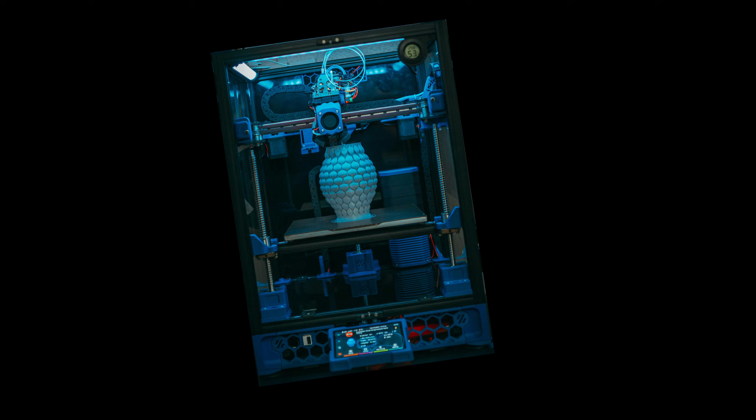After diving deep into choosing your first FDM 3D printer in our last video, it's time to talk about what truly brings your creations to life, the filament. Choosing the right material for your 3D prints is just as crucial as having a great printer. Get it right, and your prints will be strong, beautiful, and exactly what you envisioned. Get it wrong, and you might face frustrating failures, wasted time, and materials.

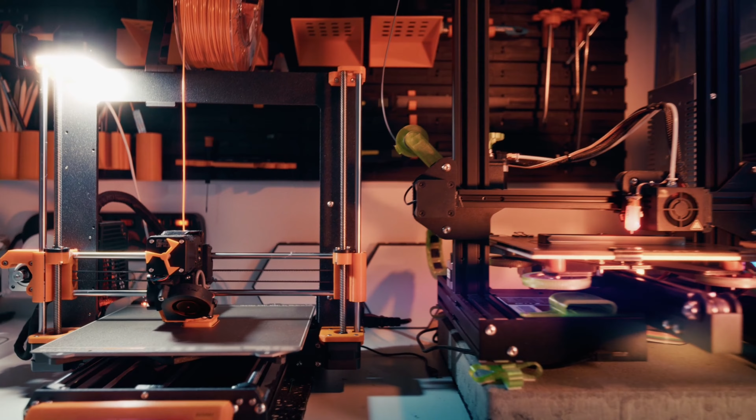So, today I'm going to guide you through the essential FDM 3D printing filaments, focusing on the ones you'll encounter most as a beginner and give you the knowledge to confidently pick the perfect material for any project.

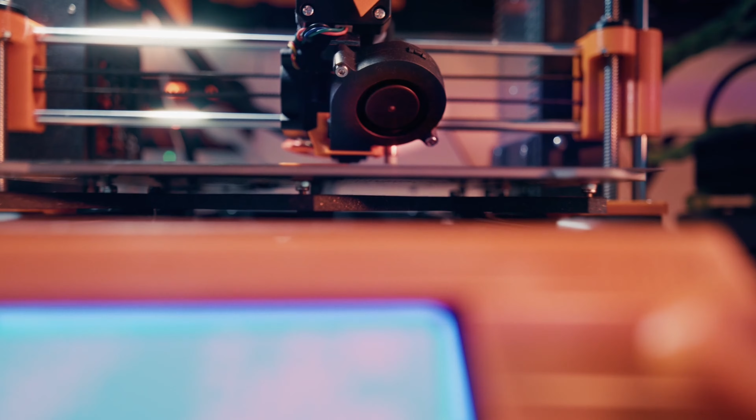First off, what exactly is filament? Think of it as the ink for your 3D printer. It's typically a plastic material wound onto a spool that your FDM printer heats up and extrudes, layer by microscopic layer, to build your design from the ground up. Understanding its properties is key to successful printing.

Let's start with the undisputed champion for beginners, PLA, or polylactic acid. If you are just getting into 3D printing, chances are your first successful prints will be with PLA. It's incredibly easy to print with, boasts minimal warping, and emits no strong odors, making it perfect for home environments.

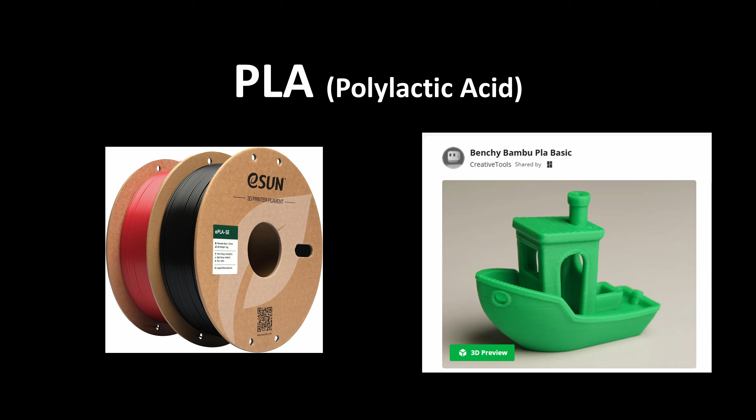PLA is fantastic for prototyping, decorative prints like vases or figurines, and non-functional parts where high strength isn't the primary concern. When printing with PLA, you will typically use lower temperatures compared to other filaments. Good bed adhesion is usually achieved with simple methods like blue painter's tape or a glue stick, and you won't

need a heated enclosure. Its pros are clear: ease of use, a vast array of vibrant colors, and it's derived from renewable resources like cornstarch, making it biodegradable. However, it can be a bit brittle and has lower heat resistance, meaning parts might deform in hot environments like a car on a sunny day.

A common beginner mistake is leaving PLA exposed to humidity, which can degrade its quality over time, leading to issues like stringing or brittle prints. Always store your PLA in a dry place.

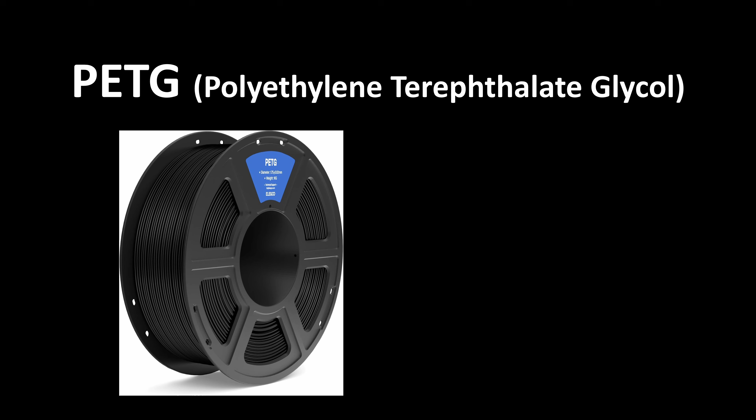Moving up a notch in durability, we have PETG, polyethylene terephthalate glycol. This material is often considered the best of both worlds, offering more strength and flexibility than PLA, along with excellent layer adhesion. It's also known for its food safe options, making it suitable for functional parts, mechanical components, outdoor prints, or anything that needs a bit more resilience than PLA can offer.

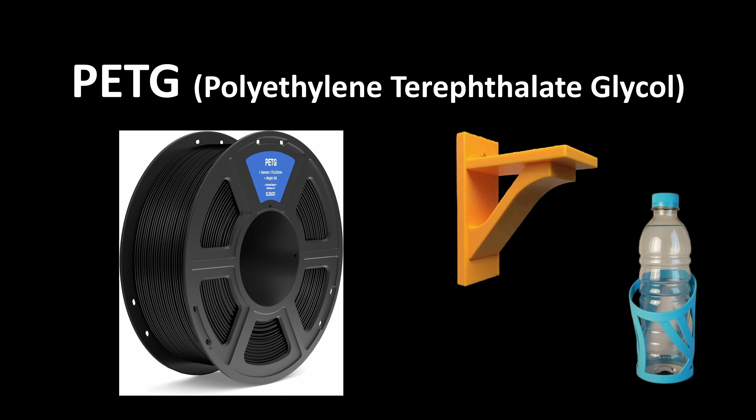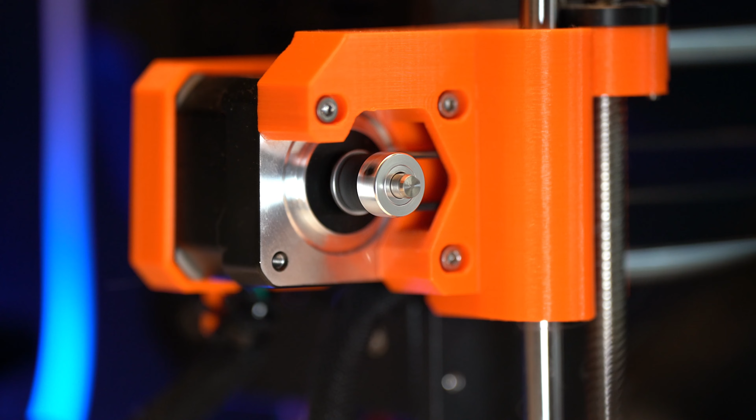Printing with PETG requires slightly higher temperatures than PLA, and you might notice it can be a bit stringy. This is where fine tuning your printer's retraction settings becomes crucial. Proper retraction pulls the filament back slightly when the print head moves, preventing those pesky strings. While not strictly necessary, PETG benefits greatly from a heated print bed for optimal adhesion.

Compared to PLA, PETG offers superior durability and better temperature resistance, but it's generally a bit trickier to print than PLA, though still much easier than our next material, ABS.

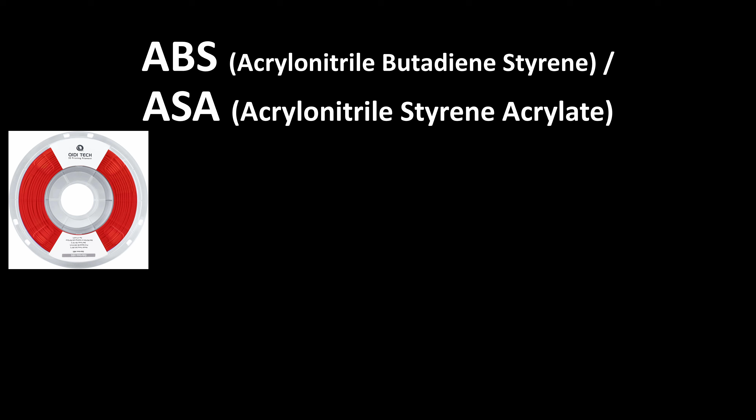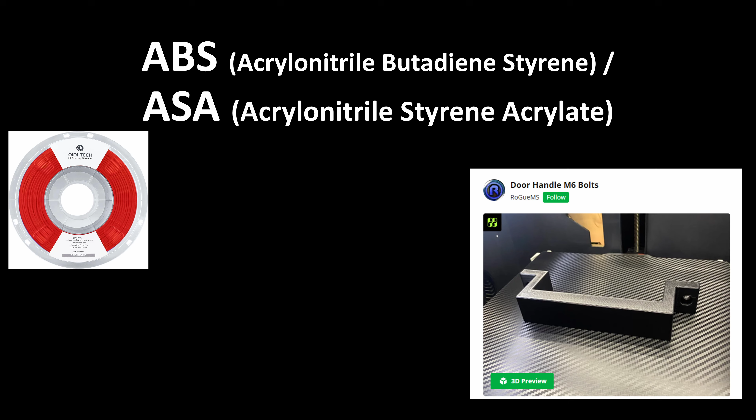Then there is ABS, or acrylonitrile butadiene styrene, the classic workhorse of 3D printing. ABS is incredibly strong, impact resistant, and boasts excellent heat resistance, making it ideal for mechanical parts, electronic enclosures, automotive components, or any item that will face higher temperatures or significant stress.

However, ABS comes with its own set of challenges. It requires a heated print bed and often an enclosed printer to prevent warping and cracking, as it's prone to shrinking as it cools. Another important consideration is the fumes it emits during printing, which can be quite strong. Proper ventilation is essential when working with ABS.

While its strength is a huge advantage, the difficulty in printing and the ventilation requirements often steer beginners towards PLA or PETG first. For outdoor applications, you might also consider ASA, which shares many of ABS's properties but offers better UV resistance, preventing degradation from sunlight.

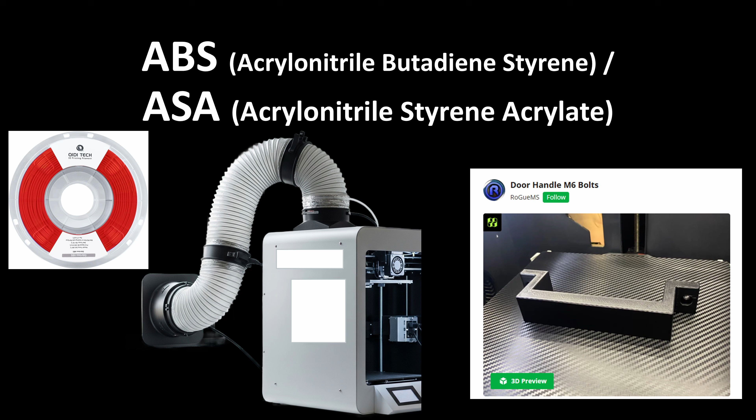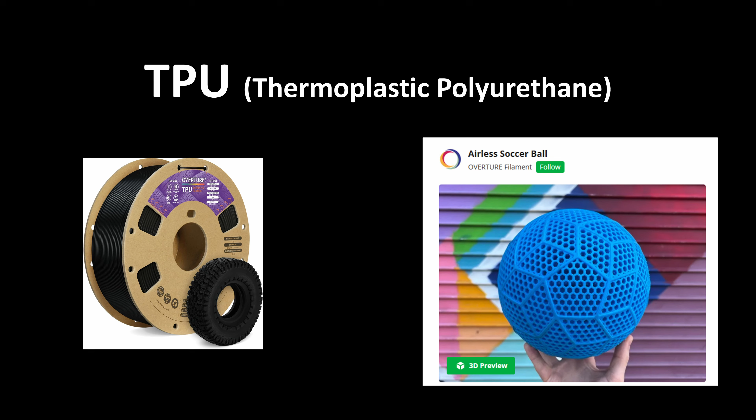Beyond these common three, there is a whole world of specialized filaments. Let's touch on a couple you might encounter as you advance. TPU, or thermoplastic polyurethane, is our go-to for flexible prints. Think rubber-like flexibility, perfect for phone cases, gaskets, or any part that needs to bend or absorb shock. You will print TPU slowly, and it often works best with direct drive extruders to prevent tangling.

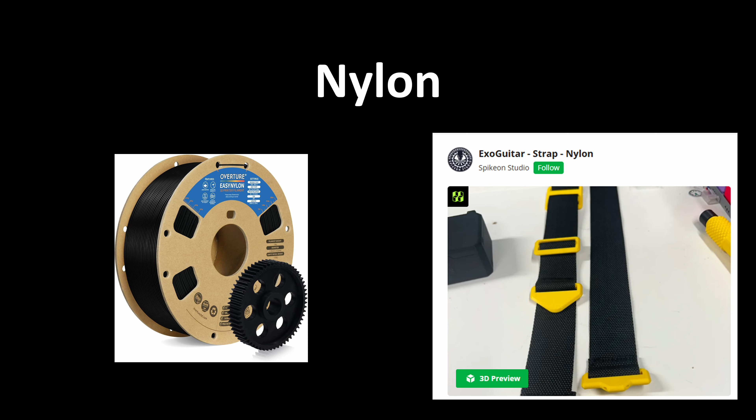For industrial level strength and low friction, we look to nylon. This material is incredibly durable and wear resistant, making it ideal for functional prototypes and gears. But be warned, nylon is highly hygroscopic, meaning it loves to absorb moisture from the air. It requires very dry storage and often benefits from a heated chamber during printing to achieve the best results. If your nylon sounds like popcorn when printing, it's wet.

Finally, we have composite filaments. These are standard filaments infused with other materials like carbon fiber, glass fiber, wood, or even metal particles. They offer unique aesthetics or enhanced properties, but beware, their abrasive nature often demands a hardened steel or ruby tipped nozzle, as standard brass nozzles will wear out quickly.

Now, let's take a look at different filament types and various flavors we have access to. Let's start with PLA, basic standard PLA. The most common, easy to print, wide range of opaque colors.

PLA Plus, enhanced version with improved strength, toughness, and sometimes better heat resistance and less brittleness than standard PLA. Silk PLA produces prints with a glossy, smooth, almost metallic or pearlescent finish, often resembling silk fabric.

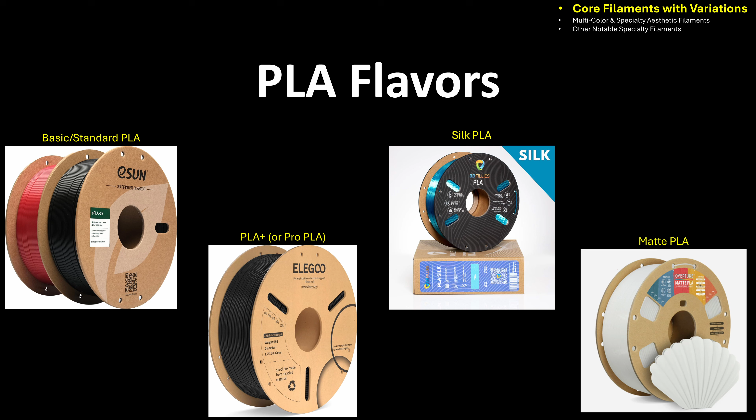Matte PLA offers a non-glossy, subdued finish, excellent for reducing visible layer lines and a more professional, less reflective look. Glow in the dark PLA contains phosphorescent pigments that absorb light and then glow in the dark. Available in various glow colors: green, blue, etc.

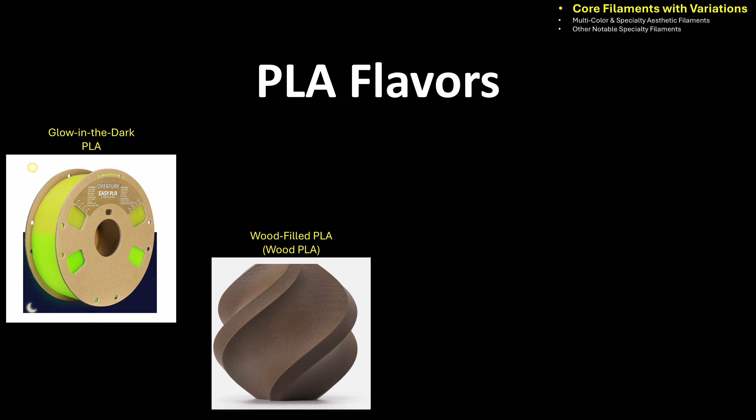Wood filled PLA or wood PLA contains real wood fibers, giving prints a wood-like appearance, texture, and even smell. Can often be stained or sanded. Metal filled PLA or metal PLA contains fine metal powders. For example, bronze, copper, aluminum, stainless steel. Prints have a metallic sheen and can often be post-processed, sanded, polished, patinated to look more like real metal.

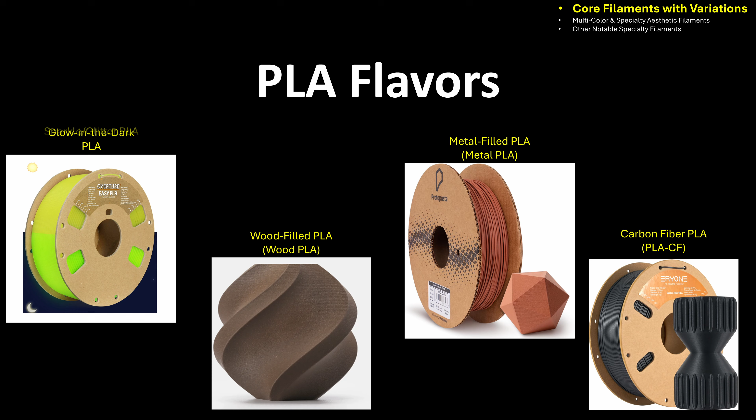Carbon fiber PLA or PLA-CF, infused with chopped carbon fibers, significantly increasing stiffness, strength, and dimensional stability while reducing weight. Requires an abrasive resistant nozzle. Sparkle or glitter PLA contains glitter or sparkly particles for a shimmering effect. Transparent or translucent PLA allows light to pass through, creating clear or semi-transparent prints.

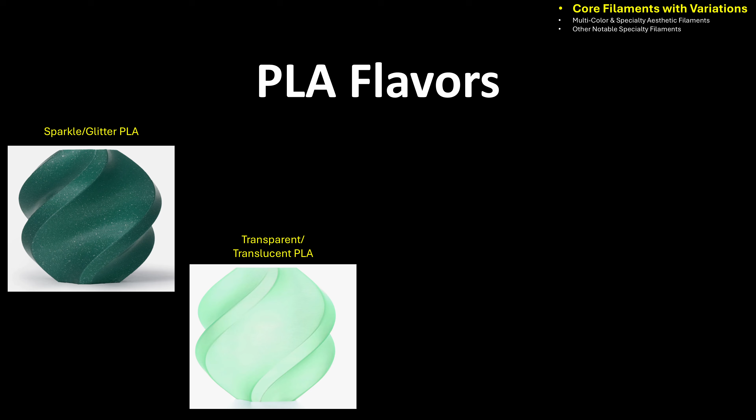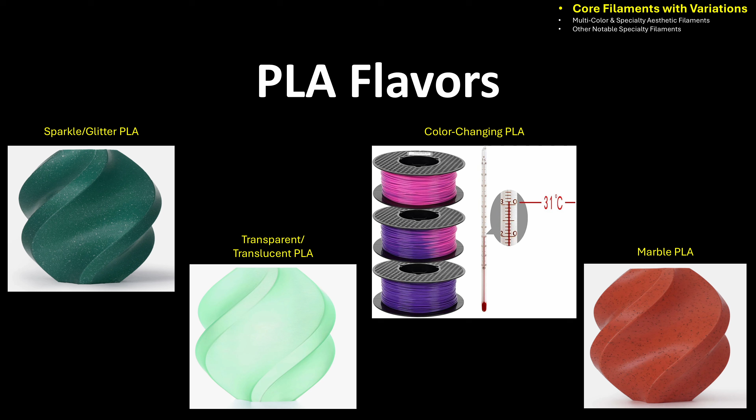Color changing PLA. Thermosensitive or thermochromic changes color based on temperature. UV reactive or photochromic changes color when exposed to UV light or sunlight. Marble PLA contains small flakes or particles to mimic the look of natural marble stone. High speed PLA or PLA-HS, formulated for faster printing speeds with less risk of clogging or loss of quality, often optimized for newer high speed printers.

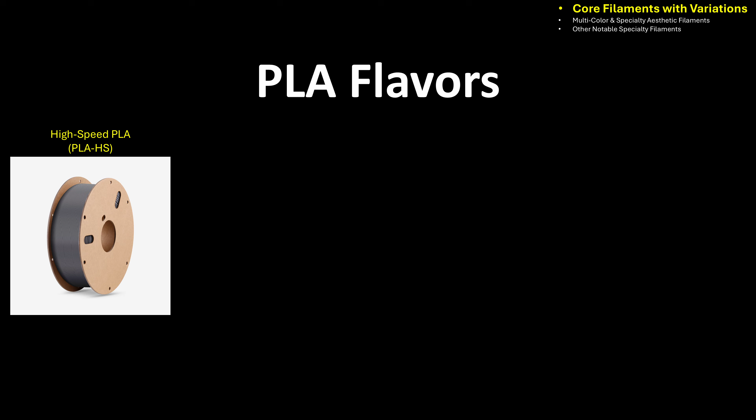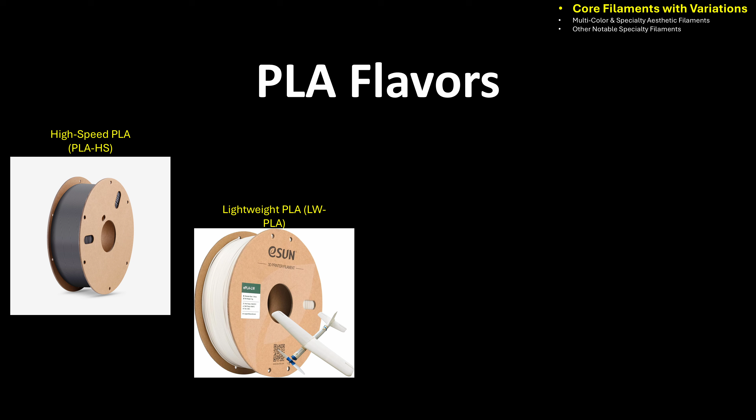Lightweight PLA, LW-PLA, designed for low density prints, often used for RC planes, cosplay props, as it can foam during printing to create lighter parts. Conductive PLA contains conductive particles, allowing for printing of low voltage circuits or touch sensitive interfaces. Scented PLA, infused with scents that are released during printing. For example, coffee, chocolate, fruit.

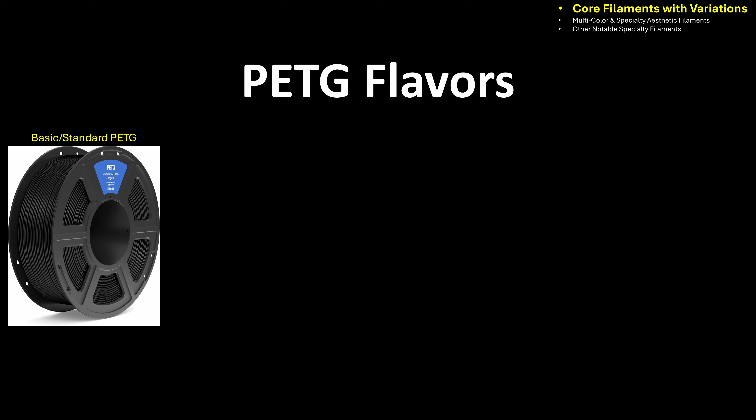PETG, polyethylene terephthalate glycol modified. Basic or standard PETG, known for good strength, flexibility, chemical resistance, and ease of printing relative to ABS. Available in opaque and translucent colors. PETG-CF, carbon fiber PETG. PETG reinforced with carbon fibers for increased stiffness and strength, similar to PLA-CF. Requires an abrasive resistant nozzle.

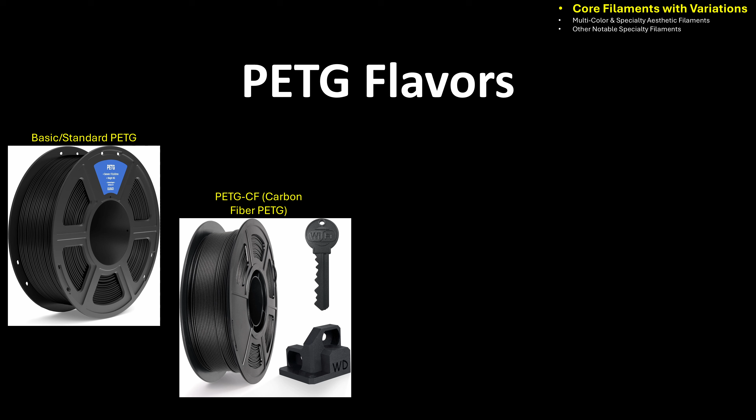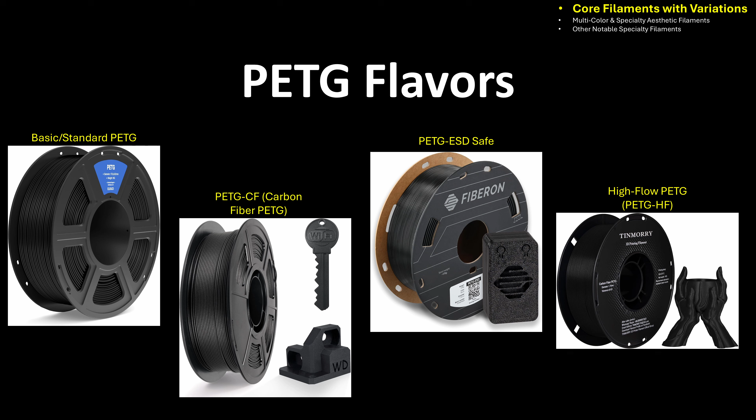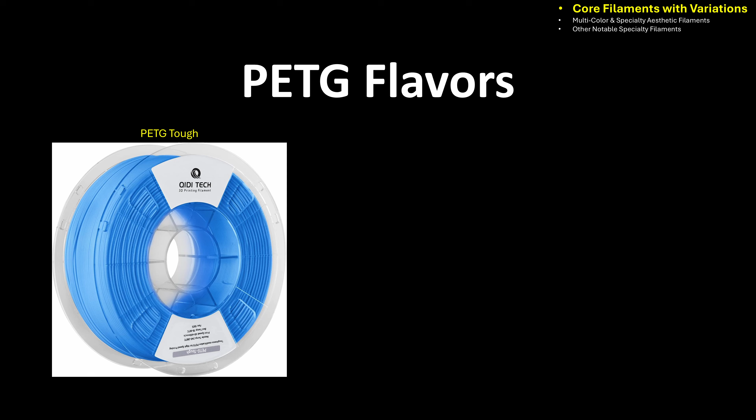PETG ESD safe contains additives to make it electrostatic dissipative, suitable for printing electronic enclosures or parts that need to prevent static discharge. High flow PETG or PETG-HF, optimized for higher print speeds, reducing limitations for faster printers. PETG Tough, enhanced version with increased impact resistance. Transparent PETG, very popular for clear parts due to its inherent clarity and strength.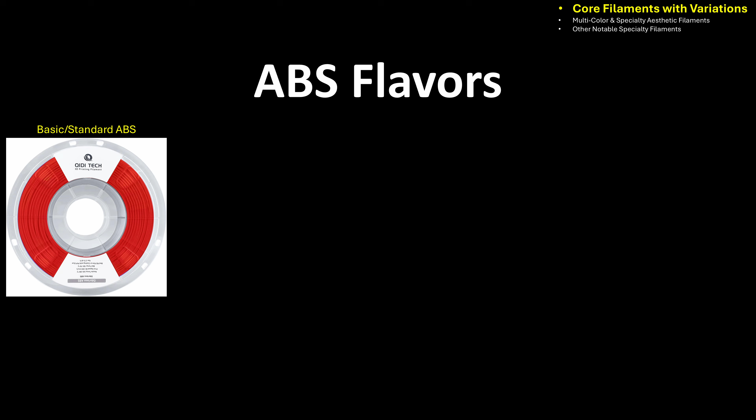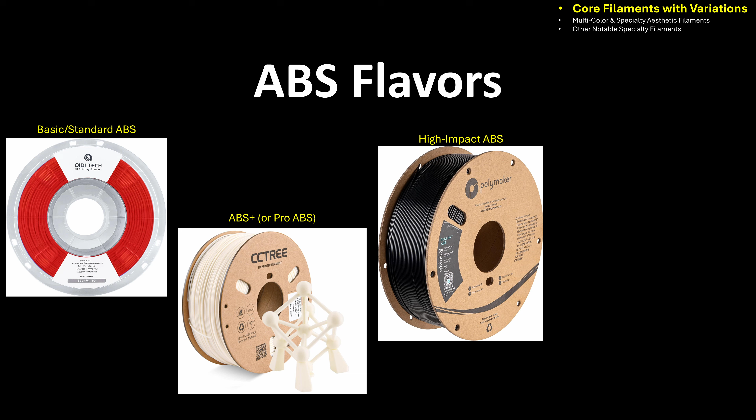ABS or acrylonitrile butadiene styrene. Basic or standard ABS. Strong, durable, and good heat resistance, but prone to warping and emits fumes. Wide range of opaque colors are available. ABS Plus or Pro ABS. Improved version with reduced warping, better layer adhesion, and sometimes less odor. High impact ABS, formulated for even greater toughness and impact absorption.

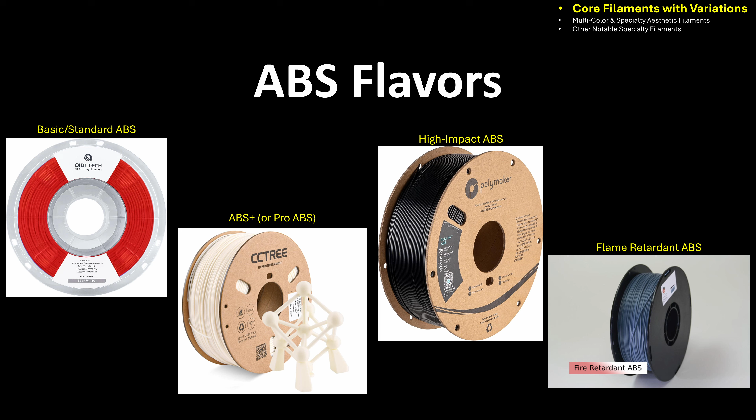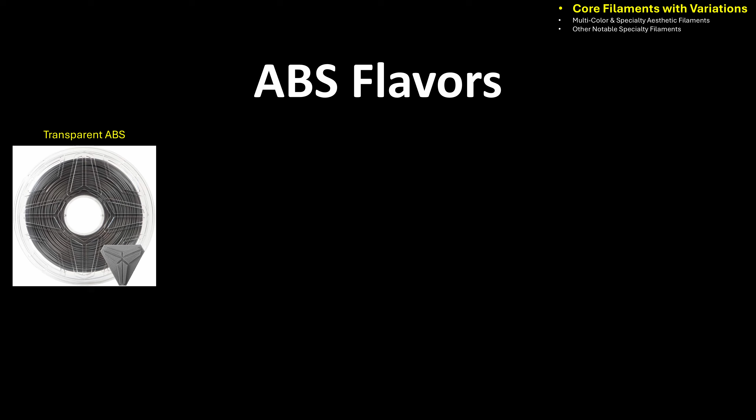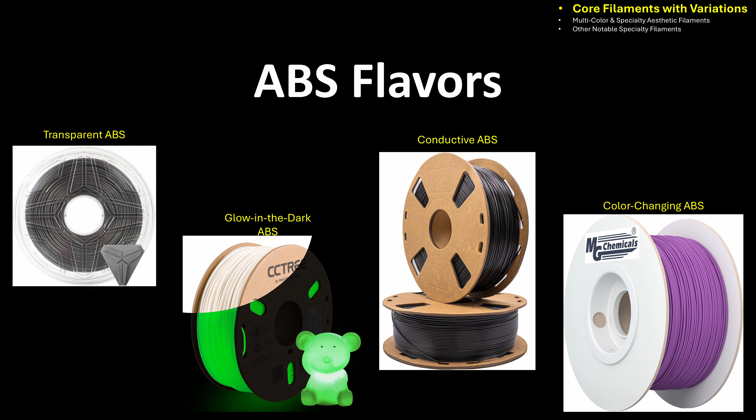Flame retardant ABS contains additives to make it self-extinguishing or resistant to burning, important for certain industrial or electronic applications. Transparent ABS allows for translucent parts, though often with a slight yellow tint. Glow in the dark ABS contains phosphorescent pigments for glow effects. Conductive ABS, blended with conductive carbon particles for creating electrically conductive components. Color changing ABS, similar to PLA, thermosensitive and UV reactive versions exist.

ABS-CF, carbon fiber ABS. ABS reinforced with carbon fibers for maximum strength and stiffness. Requires an abrasive resistant nozzle. ABS Kevlar. ABS reinforced with Kevlar fibers for extreme durability.

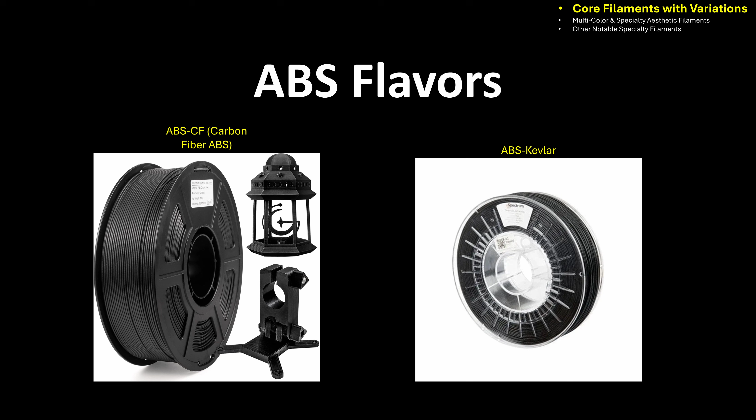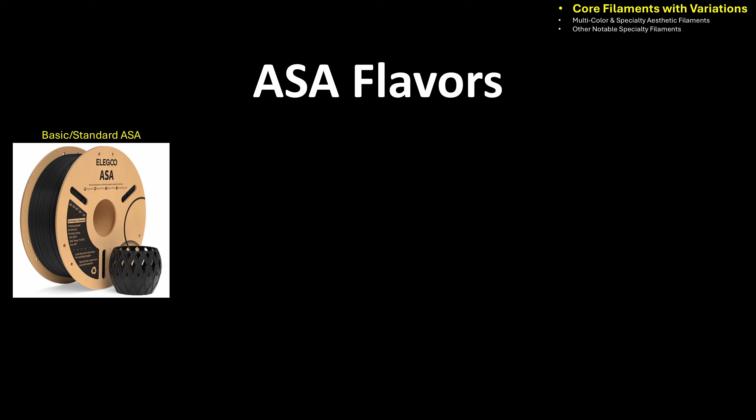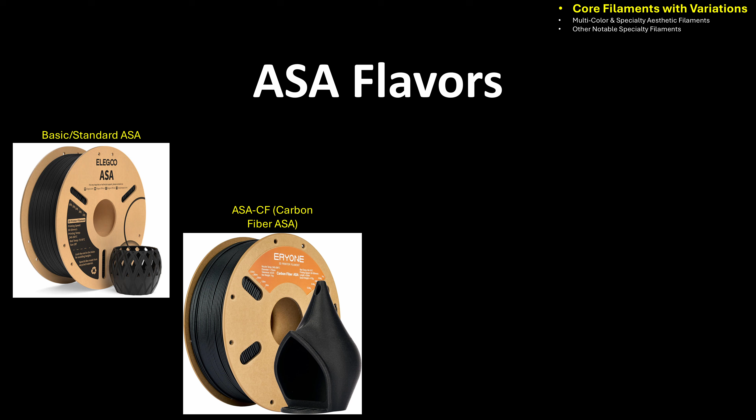ASA, acrylonitrile styrene acrylate. Basic or standard ASA, known for excellent UV resistance, weatherability, and similar mechanical properties to ABS, but without the yellowing or degradation in sunlight. Available in various opaque colors. ASA-CF, carbon fiber ASA. ASA reinforced with carbon fibers, offering enhanced strength and dimensional stability while retaining UV resistance. Requires an abrasive resistant nozzle.

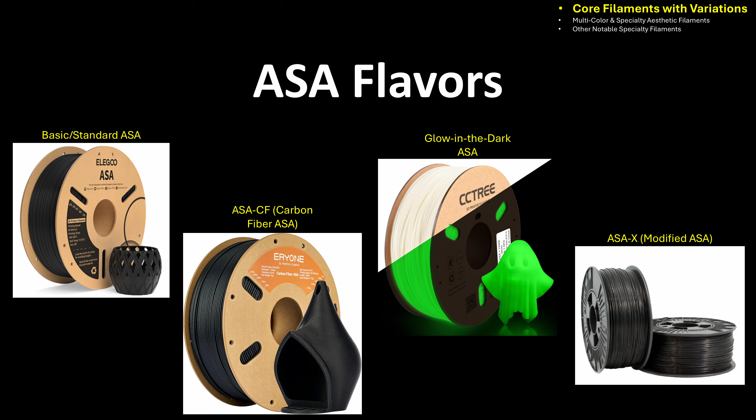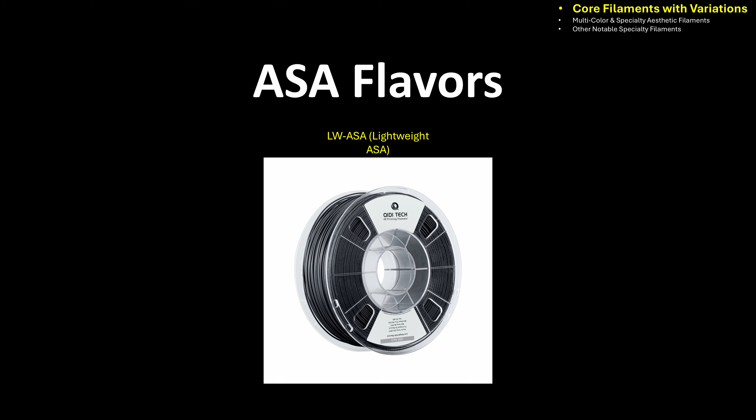Glow in the dark ASA, ASA with phosphorescent additives. ASA-X or modified ASA often refers to improved formulations for better printability and specific mechanical enhancements. LW-ASA or lightweight ASA can foam like LW-PLA for lighter parts, maintaining ASA's environmental resistance.

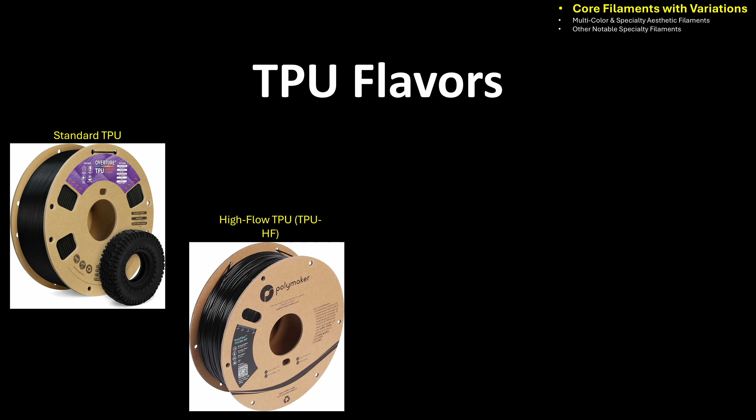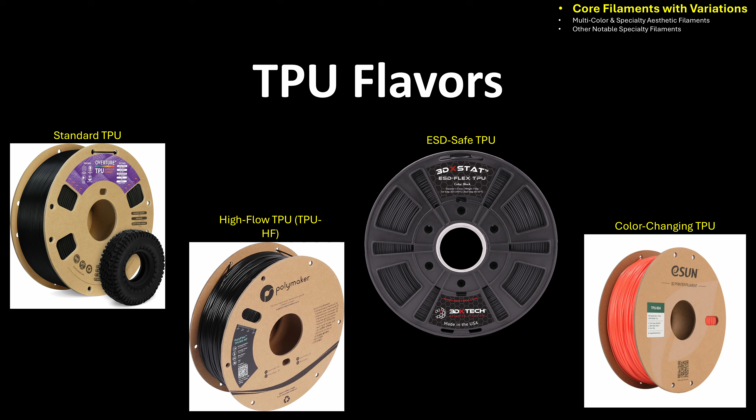TPU or thermoplastic polyurethane. Standard TPU, the most common flexible filament, known for its elasticity, abrasion resistance, and durability, measured by shore hardness. For example, 95A, 90A, 85A, 60A. Lower number means more flexible. High flow TPU or TPU-HF, optimized for faster printing with less extrusion issues. ESD safe TPU, electrically dissipative for sensitive electronic applications. Color changing TPU, less common but exists.

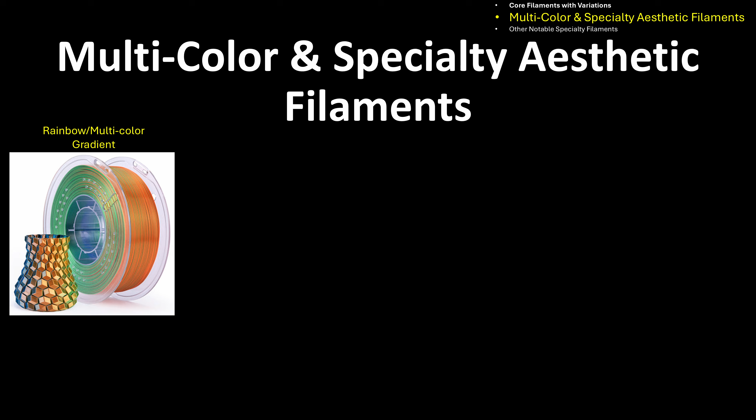Multicolor and specialty aesthetic filaments, often PLA based but can apply to others. Rainbow or multicolor gradient, a single spool that transitions through multiple colors. For example, red to orange or yellow to green to blue. The color changes gradually along the length of the filament.

Dual, triple, quad color, co-extruded. These filaments are extruded with two, three, or even four different colors side by side in a single strand. When printed, the object shows different colors depending on the viewing angle, creating a dynamic, iridescent effect, often referred to as magic or mystic filaments.

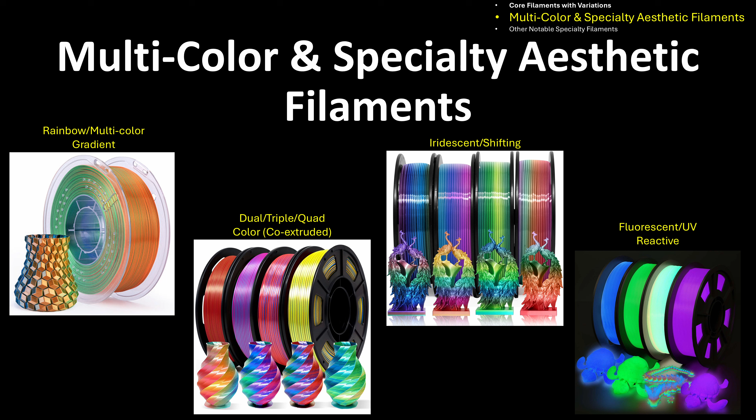Iridescent or shifting: filaments that have a subtle color shift or shimmer depending on how light hits them, often a mix between silk and a very fine glitter. Fluorescent UV reactive: filaments that glow vibrantly under UV or black light but don't retain a glow in the dark. Chroma or metallic sheen: filaments specifically designed to mimic polished metals without containing actual metal particles.

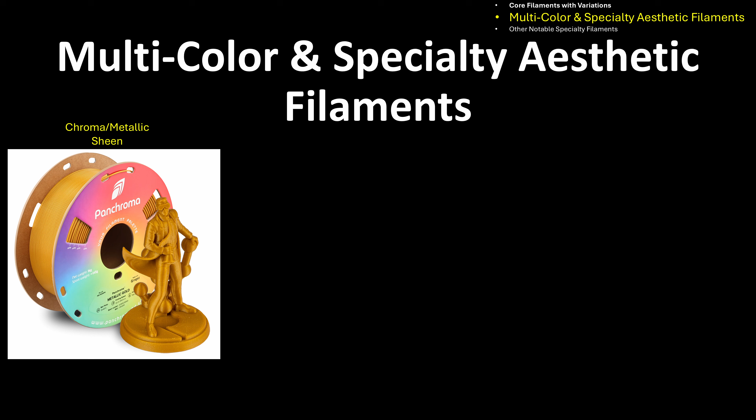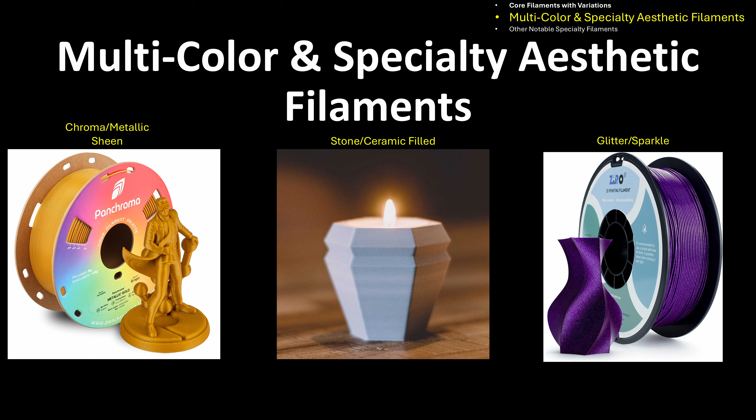Stone or ceramic filled: contains fine stone or ceramic particles for a textured, matte, or often heavier print resembling natural materials. Glitter or sparkle, already mentioned under PLA, but can be found in other bases too. Other notable specialty filaments: nylon. Standard nylon is strong, flexible, durable, low friction, but highly hygroscopic; it absorbs moisture readily.

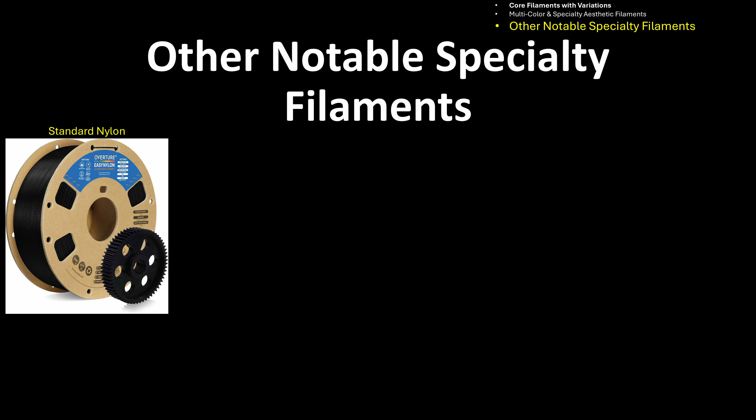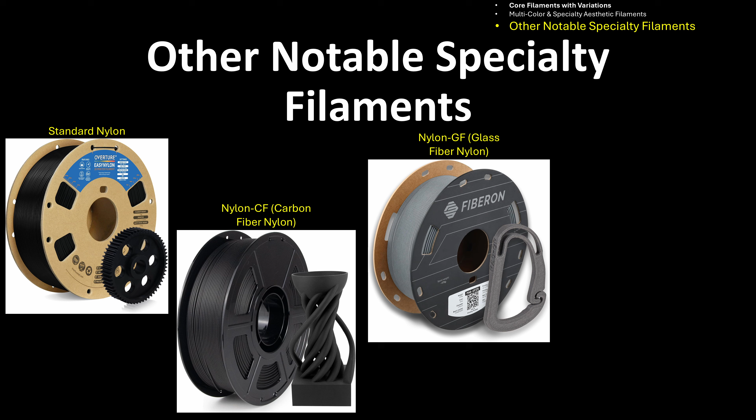Nylon CF, carbon fiber nylon: extremely strong and stiff, very popular for industrial applications, requires abrasive resistant nozzles and dry storage. Nylon GF, glass fiber nylon: nylon reinforced with glass fibers for improved strength and stiffness. Polycarbonate: very strong, heat resistant, tough. Can be challenging to print.

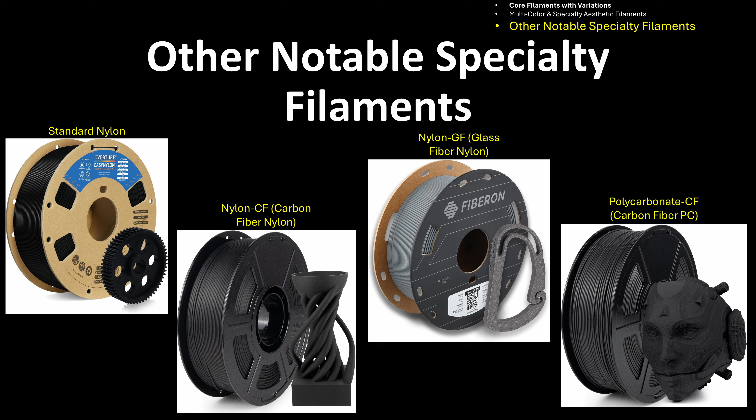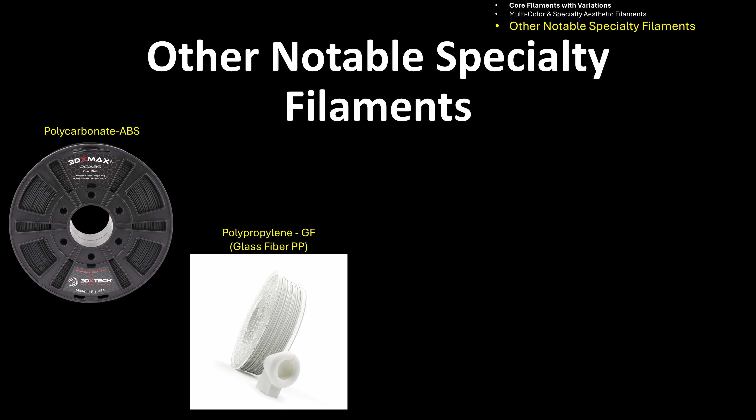PCCF, carbon fiber PC: polycarbonate reinforced with carbon fiber. PC-ABS, a blend combining properties of both. Polypropylene, PP: lightweight, chemical resistant, flexible, good layer adhesion, difficult to print due to warping. PPGF, glass fiber PP, reinforced with glass fibers. PPCF, carbon fiber PP, reinforced with carbon fibers.

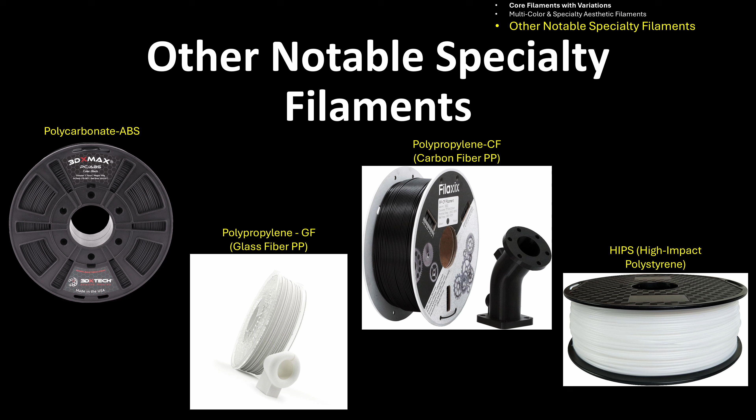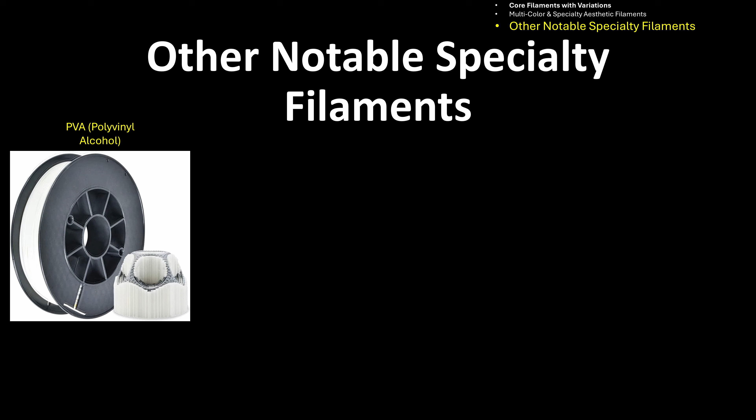HIPS, high impact polystyrene, often used as a soluble support material, dissolves in limonene for ABS, but can also be printed as a standalone material with properties similar to ABS but less warping. PVA, polyvinyl alcohol, water soluble support material, primarily used with dual extruder printers, dissolves completely in water. PVA, polyvinyl acetate, a type of water soluble support.

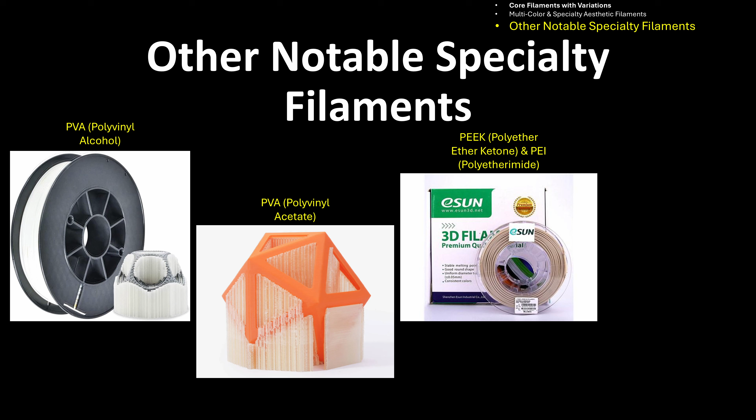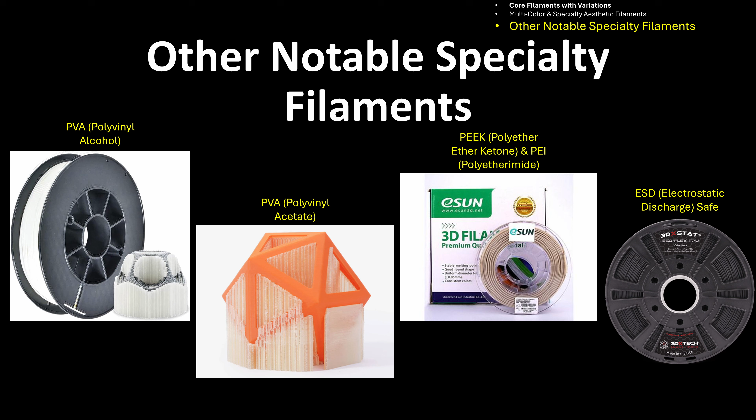PEEK, polyether ether ketone, and PEI, polyetherimide, high performance engineering plastics for extreme applications requiring high temperatures, chemical resistance, and strength. Require specialized high temperature printers. ESD, electrostatic discharge safe: various materials, PLA, PETG, ABS, PC, etc., treated to be static dissipative, crucial for printing parts for electronics or sensitive environments. Magnetic filaments contain powdered iron, allowing prints to be attracted by magnets.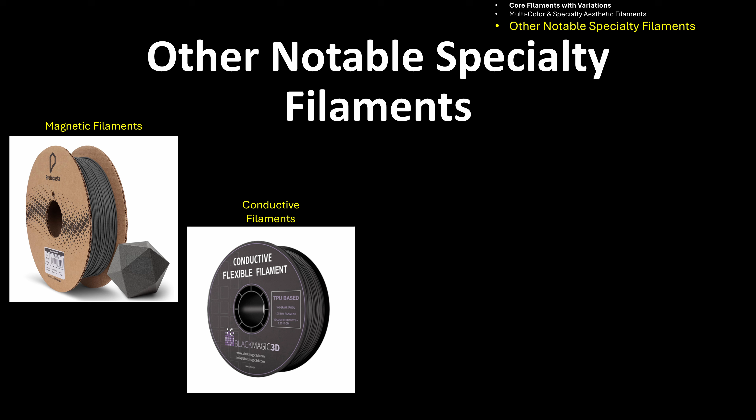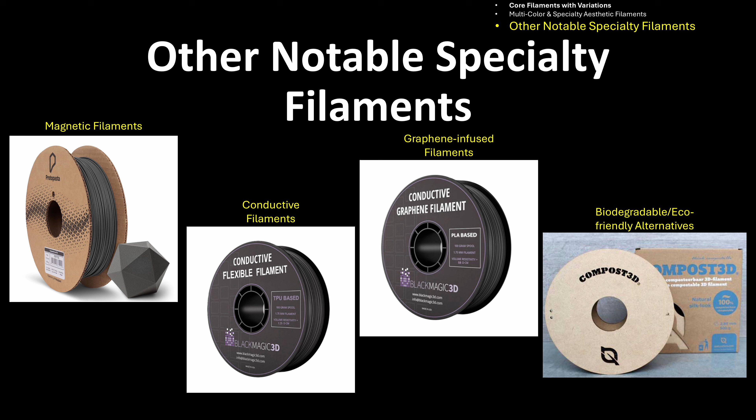Conductive filaments, already mentioned for PLA and ABS, for basic electronic circuits. Graphene infused filaments for enhanced conductivity or other properties. Biodegradable or eco friendly alternatives: while PLA is biodegradable, some companies offer other blends marketed for their environmental footprint. Food safe filaments: while many plastics are inherently food safe, the printing process itself can introduce contaminants. Some manufacturers specifically certify their filaments for food contact, though. Always research best practices for 3D printed food contact items.

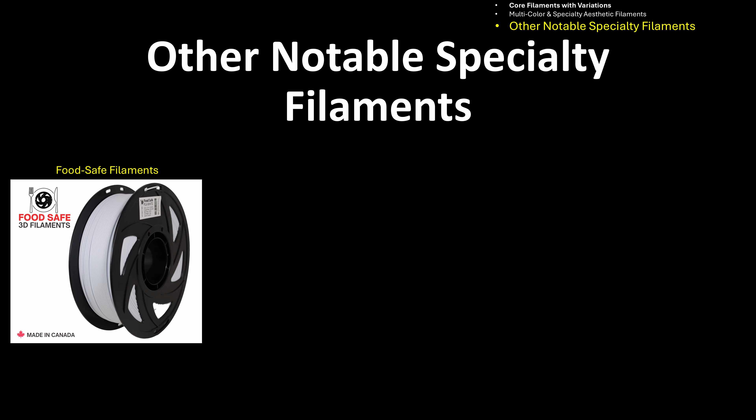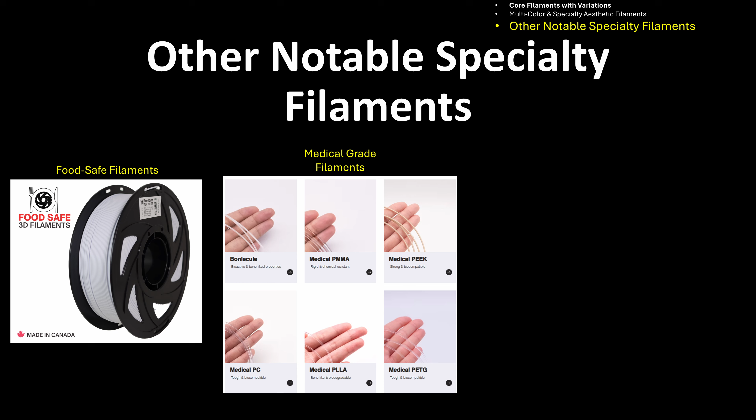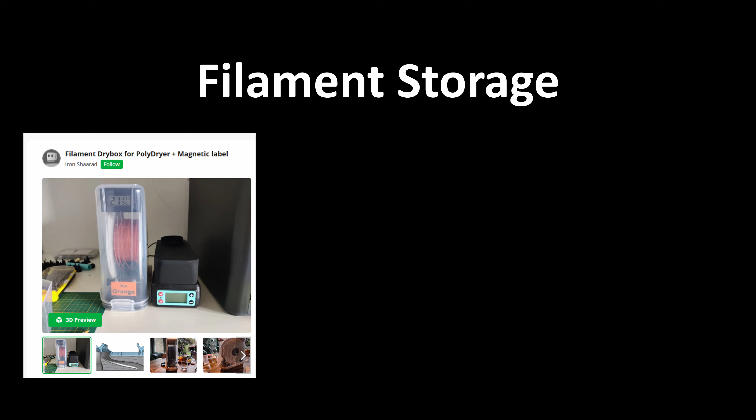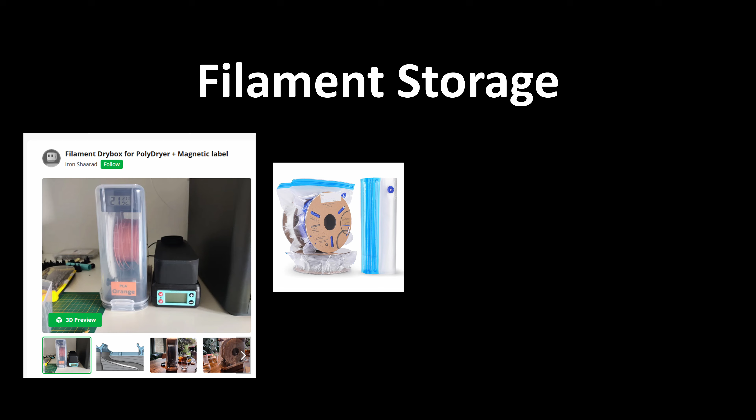Medical grade filaments designed for specific medical applications, often biocompatible and sterilizable. Recycled filaments offering a more sustainable option. Now, beyond the filament type itself, there are a few essential considerations for any beginner. First, proper filament storage. Humidity is the enemy of most filaments, especially hygroscopic ones like nylon or PVA, polyvinyl alcohol, often used for dissolvable supports.

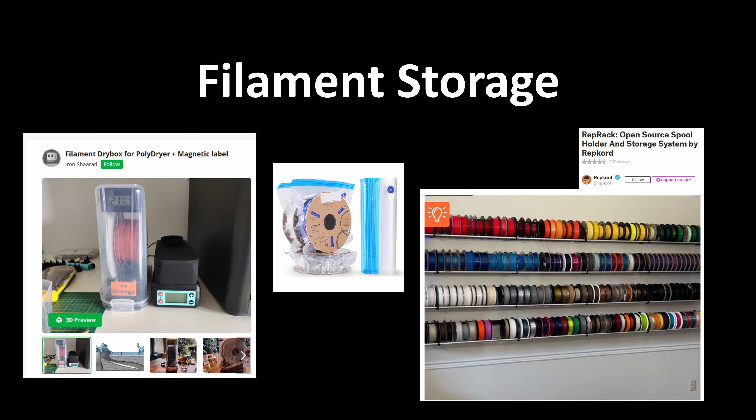Keeping your filaments dry, whether in a dedicated dry box or vacuum sealed bags, prevents common print issues like stringing, blobbing, and weak layer adhesion. You can literally hear a difference if your filament is wet, a popping sound as it prints, indicating moisture boiling off. Next, let's talk about nozzle types. For PLA, PETG, and ABS, a standard brass nozzle is perfectly fine.

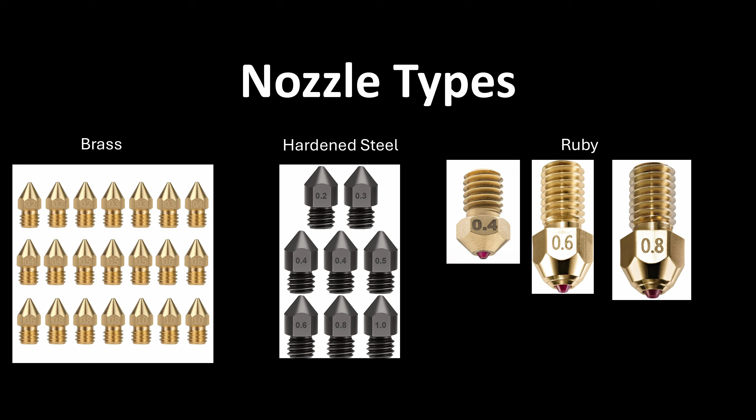But as you venture into those exciting composite filaments like carbon fiber or even glow in the dark, their abrasive particles will quickly wear down brass. That's when you will need to upgrade to hardened steel or even ruby tipped nozzles, which are designed to withstand the extra wear and tear. Remember that optimal print settings like temperature and speed will vary not just by filament type but also by your specific printer model. Don't be afraid to experiment and

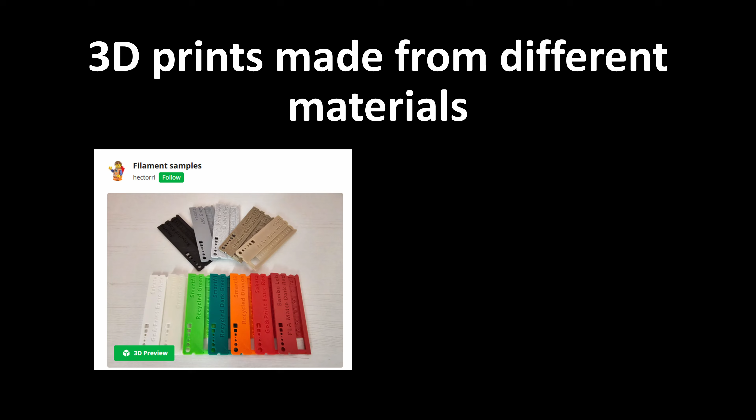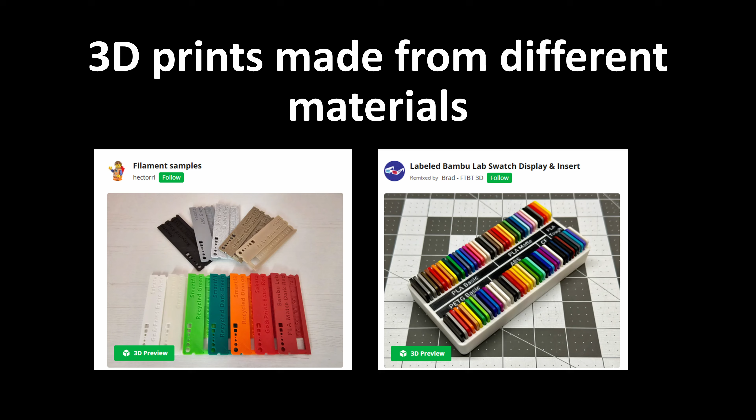fine tune your settings. Finally, when purchasing filaments, you will find a wide range of prices. While cost shouldn't be your only driver, rest assured that even more affordable filaments have significantly improved in quality, and high quality options have become more accessible. It's about finding a balance between budget, print quality, and reliability for your needs.

So, there you have it, a comprehensive dive into the world of FDM 3D printing filaments. From the beginner friendly PLA to the tough ABS, flexible TPU, and specialized composites, each material offers unique properties for your creative journey. The key is to understand what each filament is best for and how to handle it for the best results. Don't be afraid to experiment. Each filament has its own personality, and learning to master them is a rewarding part of the 3D printing experience.